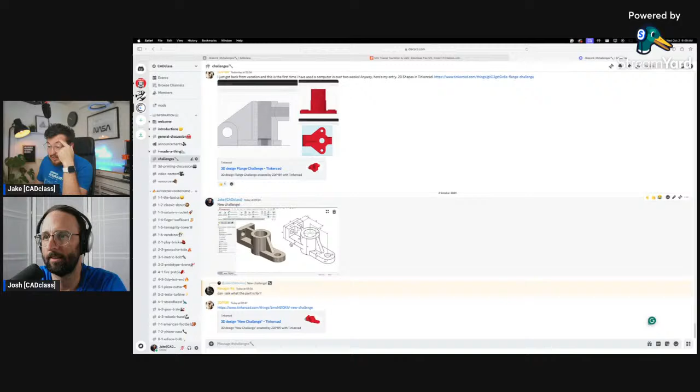Oh yeah, I don't know where my Discord is. Here we go. So this is going to be the newest one. It is fairly simple, but it's got some tricky bits as far as referencing one distance from another. This was made in SolidWorks, which is why all the tools are different, but the actual drawing should be pretty much the same. This should be fun, this should be cool.

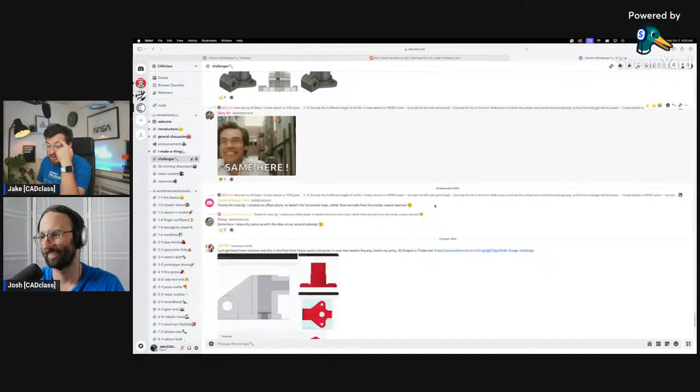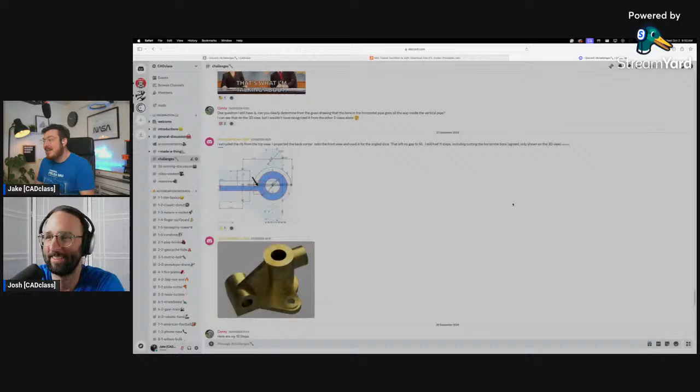From last week, we got a bunch of people. Dan made it in Tinkercad as always, mind blowing. But Connie, making it in 10 steps, that's ridiculous. So silly how good you guys are at this, blows me away every single time. Dan's ability to continue to make these things in Tinkercad, I'm still like, what kind of madness is this? It's really impressive, kind of maniac. Yeah, it's amazing, absolutely fantastic. I'm God, you guys make these look so easy.

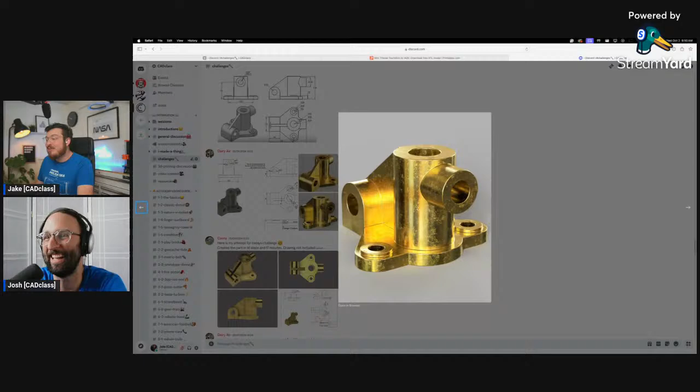It's funny, right? Look at even the appearances. Derry's posting his, I'm like, I know, oh yes, I just love this brat. No, this is Derry rubbing it in, this is twisting the knife, going 'and I rendered it.' Yeah, whatever Derry. This just makes me think of Mario and the pipes in Mario, like I feel I need a Mario character to slide down that tube and come out the edge, and suddenly you're in a secret level.

Okay, so it's going, I'm mad. So if you can see these L brackets on the left hand side, and on the front side there's 2 different levels. They're 15 mil, or they're actually parallel but on different planes. That could be handy for extruding the right hand down and the left side up. This has got holes on a different plane.

Ooh, that's a hard one. Oh, this is mighty difficult. Okay. I have a... oh God. Actually, no I don't, what the hell? Okay, so I was gonna say I have a plan, but I actually don't have a plan because this is more strange than I thought.

I'm indeed, okay, alright, countdown, 3, 2, 1, go. Okay, alright, so I'm going to start off on the top plane. I'm going to start off with the tube, actually do both of them at the exact same time. So notice the outer one has got a 60 millimeter diameter right there, and then that inner wall has got a 40 millimeter diameter.

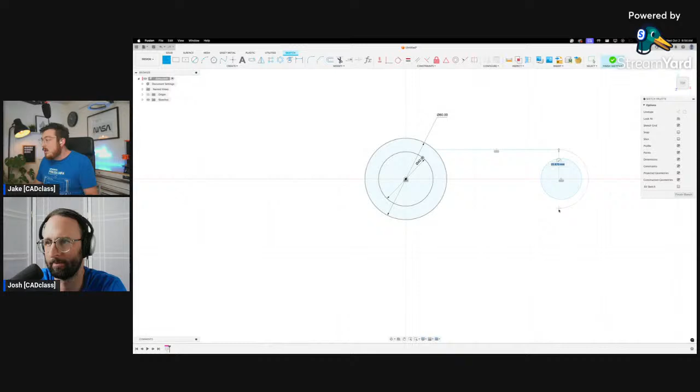Lovely, then I'm going to do essentially a top-down grooving, so that vertical tube, I'm going to do that at the exact same time. That's going to be coming off the edge totally horizontally, clicking and dragging, good little trick, and then continuing onwards. I'm going to make sure these are both tangent, and I want to make sure the arc and the circle are concentric. That one is not perfect, there we go. And then we also want to add a horizontal constraint between the center of the circle and that arc, but that's already done.

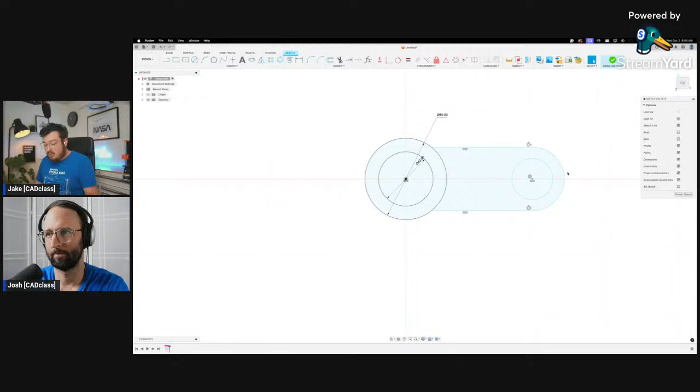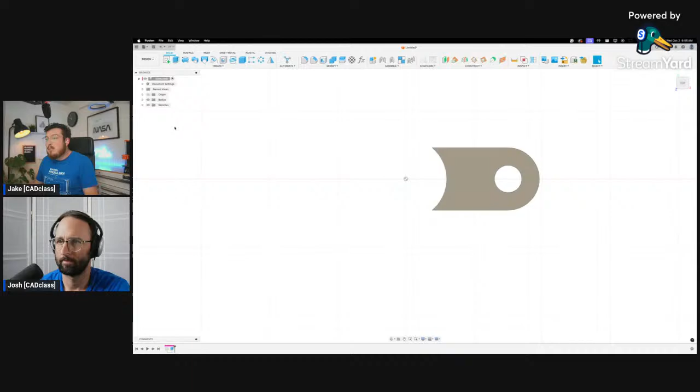75 from there. As always, we want to get as many things on our sketch as possible, but I can't really do that with the upper sections. This left-hand side, I actually want this to be on the front plane. So I'm going to go ahead and extrude that up 50 mil. Like that, 50 millimeters upwards. Go back in our sketch, turn that back on, and then I want to extrude that ring up 60. There we go. Okay. All right.

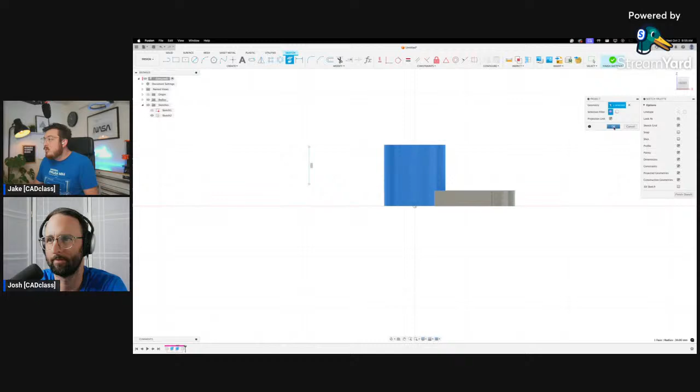So far, I have three features right now. Like I said, I want to do the ribs at the same time. Let's go ahead and go on the front plane. I want to make it on the front plane. We're going to make this little L-shaped thing, and it's going to be collinear, that top section. I need to project that face. Let's go ahead and make a line that connects those, and then going off of there.

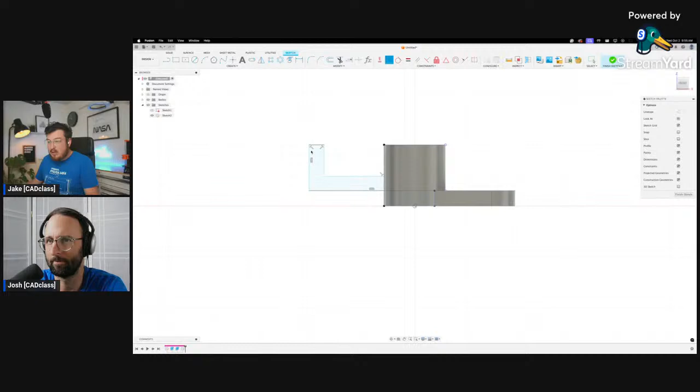That wants to be horizontal because the underside of the left-hand side is totally coplanar to the top section of that right rib. Let's get a touch off there. What is the size? That's going to be coplanar at the very top. Lovely. Ooh, how wide is that? 45 and 15. Okay.

Does anyone like the trim tool? No? No. Good. I do. Because it's awful. Oh, yeah, that's right. It's already defined. Here. Oh, that's so ridiculous.

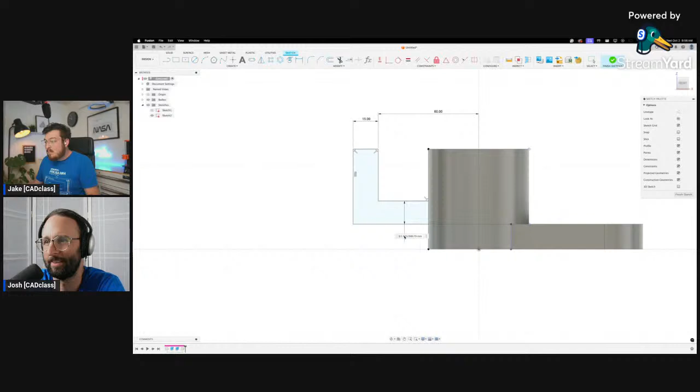Okay. What is the distance? 60 to that wall. Okay. 60 to the origin. Fantastic. Is that going to define that? No. What is the thickness there? 15. Okay. 15 mil there. Fantastic. Okay. So then I want to extrude this profile symmetrically.

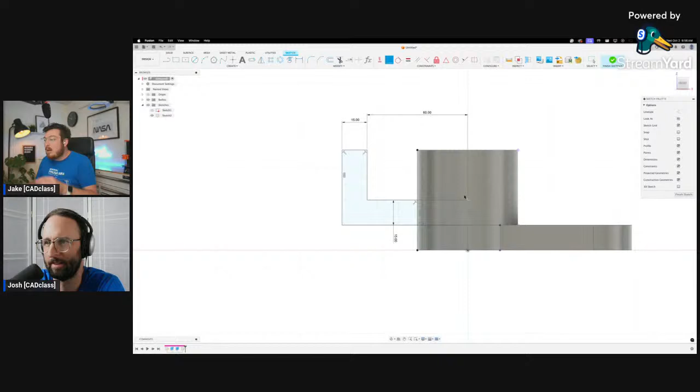But it needs to wrap around, doesn't it? Yeah, it needs to wrap around. So, oh, bugger. I should have done that second then. Bollocks. Okay. So that actually needs to extend into the body a little bit because it needs to wrap all the way around. So I want to actually pass that all the way to the origin and have that be coincident. But then I need to cut it through. That's an extra step. Damn.

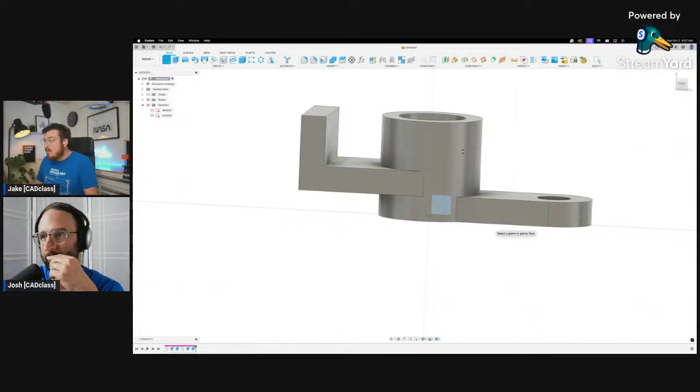That's all right. Okay, you're going for speed on this one. Going for speed, you need to make this 30 for the half width. That's going to be a join operation, but then I need to add on another feature because this little bit, this annoying thing, that needs to be cut downwards. Okay, and then I can make a new sketch on that front plane for those ribs. I believe this is just going to be a flat section, and then it's going to be a triangle.

Is that all the way to the top on there? Yes, it is. It's 25 from the front. Okay. So it's 25 to there. That's going to define that, but because it's curving... Oh, bollocks. Okay, I actually need to move some stuff around.

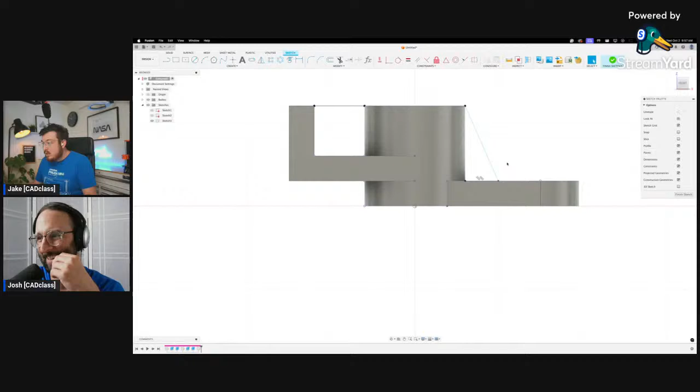I like how you get more and more British as speed is increased. Is it? Oh, well, bollocks. I get more British as I drink as well. So I think that's got a little bit of cultural significance to it.

Okay, like I said, I need to make both of these. Oh, that's not a profile. Come on, Jake. Come on. So I need to join up those two sections because it's still not a profile. There we go. Okay. Oh, for God's sake. That needs to be more inward as well because that's got a wall thickness.

What time am I at? You got 2 minutes left. I actually think I've got it. I think I do. I just want to define that because I'm a good person. Nope, it's 10. That's right. Okay. And then I'm going to extrude those three profiles.

Again, I need it to be symmetric. What's the distance? 10 millimeters. It's got half length of 5. Lovely. Join. As you can see, it's cutting into it a little bit, which sucks. I'm going to be pulling that.

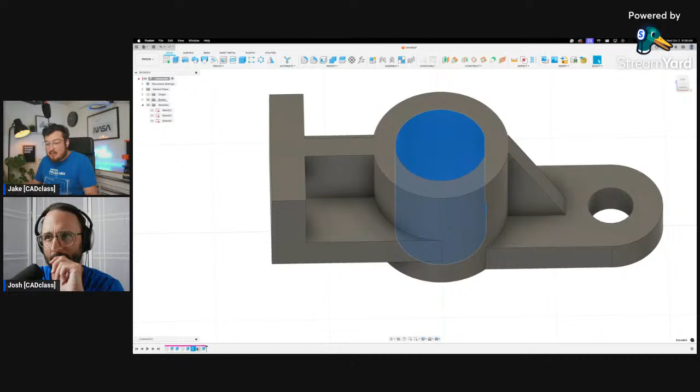This cut that we did for that flat section... no, I can't click on that little corner, so I'll have to do it from the underside. Oh, that's so ugly. Okay, so then I have to click on that little sliver of a face and then bring that upwards. Oh, that looks awful. Okay.

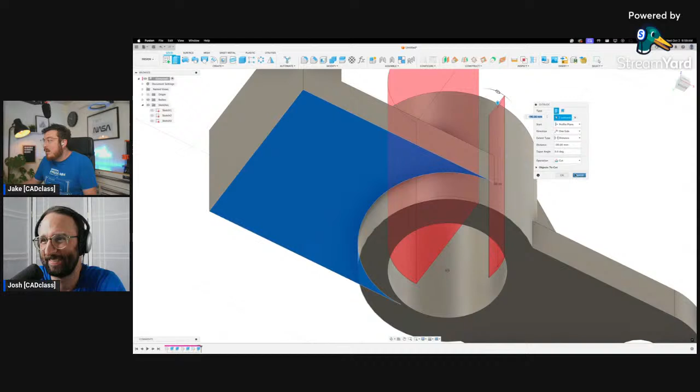So that, and then the last two things are the circles, essentially. Be on the back side. I'm just going to mirror one of them, so that can just be a mirror plane.

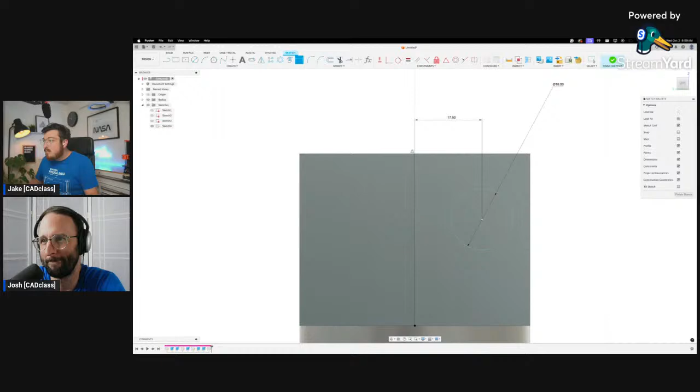That's a circle. What the hell is the size? 16. Groovy. And then 35 - what's 35 divided by 2? Is that 17 and a half? It's 15 mil down from the top.

Lovely. I want to mirror in the sketch, not in the 3D, because that would add on another feature to my timeline. Good little trick there.

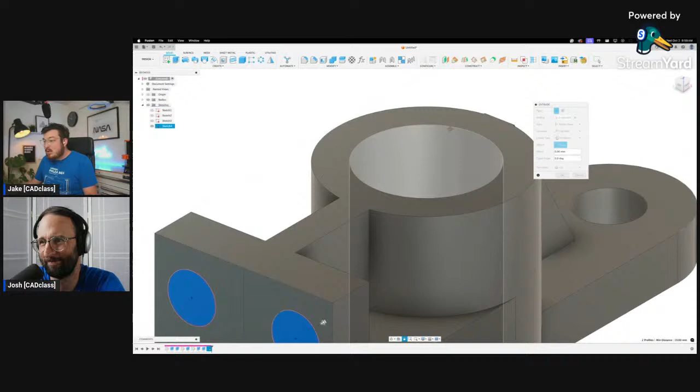Distance to all, but then I need T minus 30 seconds. Oh my god, I'm actually going to set it to distance. Click on that wall, click OK. Did I do it? I think there we go, I think I got it.

With 15 seconds to spare. Yay! 15 seconds to spare. Jake, let's double click on a couple things that you said here really quickly.

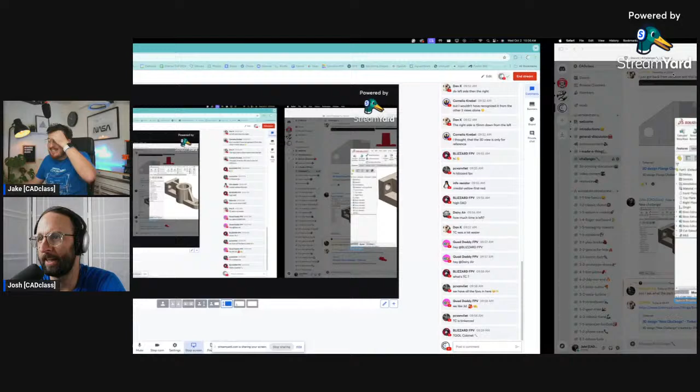So one thing you didn't do is you were like, 'What's 35 divided by 2?' and then ended up typing it in the dialog box. Fusion will do that for you, anyway. You can type in 35 divided by 2 as a dimension, and it will go ahead and calculate that for you. That's one thing I noticed.

So I'm going to get tips and tricks quickly based on what you just did. And then you said you were going to mirror the sketch entity instead of the body. Are there other examples where mirroring the body versus the sketch matters? Yeah, and why does it matter? Because I think this topic is worth talking about very quickly.

For time efficiency, if it's just for yourself, patterning or multiplying or duplicating anything in a sketch is always more efficient than doing it as a feature and then a three-dimensional pattern or mirror, because that obviously adds an extra feature. So something that would normally take three steps, you only need to do it in two. But also, having the fewest amount of features is just a skill to make you a better CAD modeler - it's not actually what you want to do in real life.

If I was going to be giving this file to another person, or actually working on it in the future when I've forgotten what I've done, then making it in many more features than it really needs to be is always going to be better.

I love it. For some reason I've been wanting to do the print in place stuff for a while, so I'm going to challenge our audience to find us some of these drawings that are print in place - that's a good one. If you could find us some print in place drawings, I would love to start to model up those print in place mechanisms. That's a whole new manufacturing discipline basically, because it's uniquely available - you're uniquely able to do it in 3D printing.